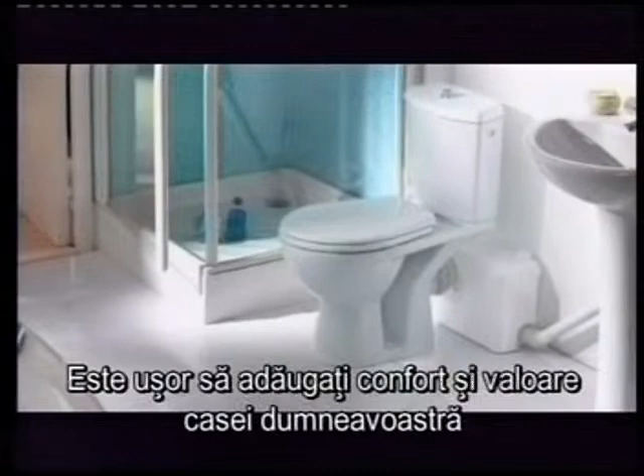It's easy to add luxury and value to your home with SaniFlo pumping systems. From loft to basement and most places in between. A downstairs loo, a kitchen or utility room, even a bath or shower room.

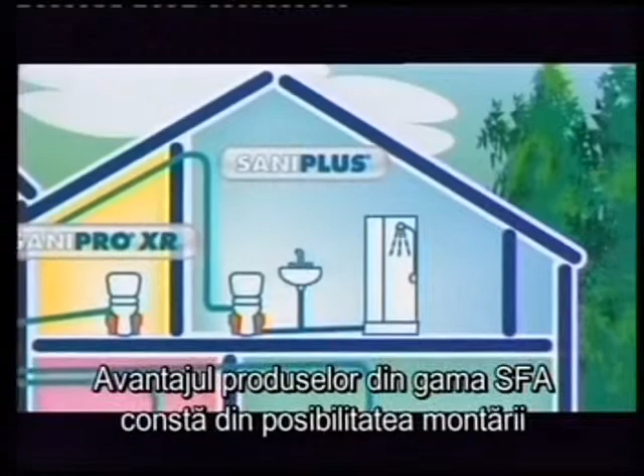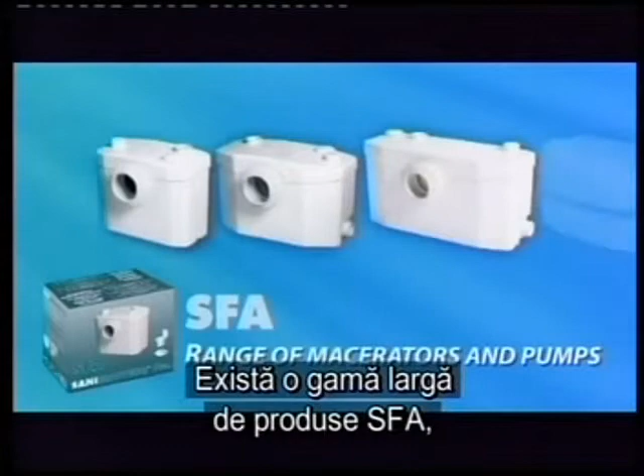The key benefit the SFA range offers is extra facilities almost anywhere, from loft to basement and most places in between. An understairs cloakroom, a basement installation, an ensuite shower room or a loft conversion. There's a range of SFA products, each designed for particular applications and markets.

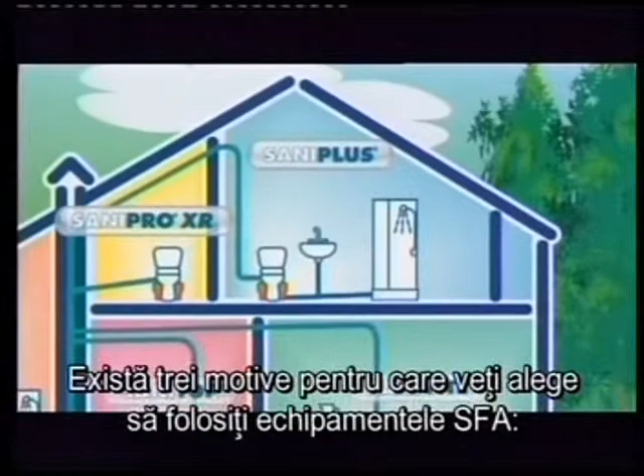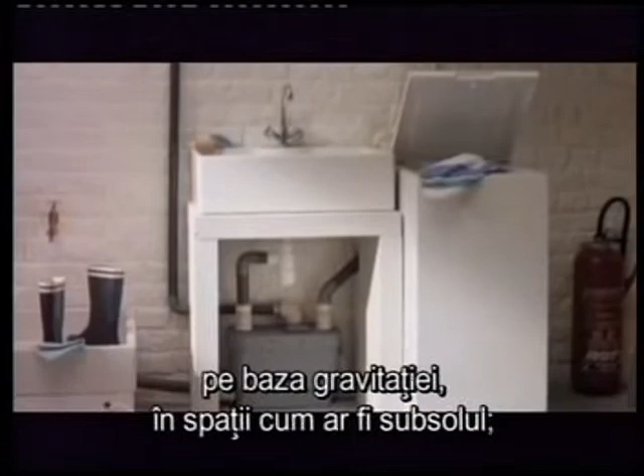From an additional WC to the addition of a complete bathroom in hard-to-plumb places. There are 3 reasons why you would use a SFA unit. 1. Because it's impossible to use conventional gravity drainage, as in a basement. 2. Where it would be too disruptive. Or 3. Where it would be too expensive.

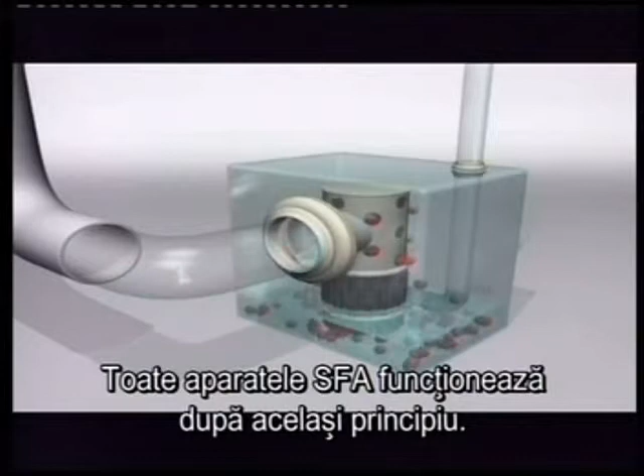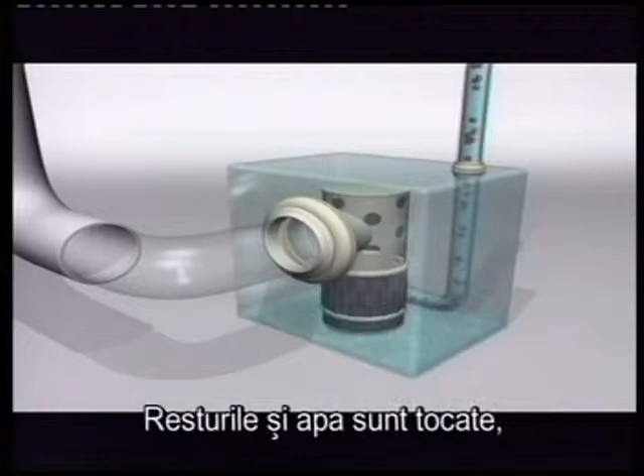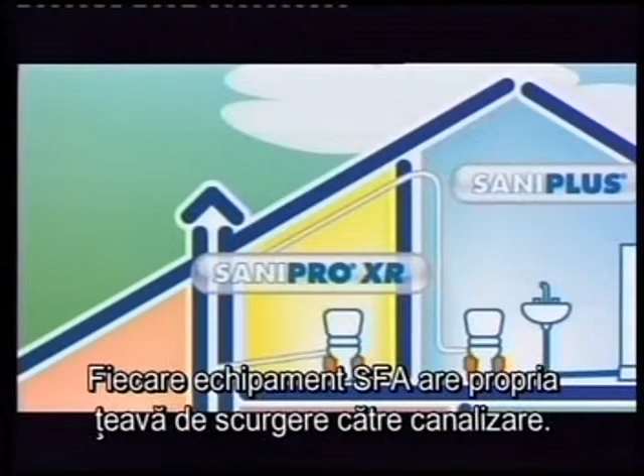All SFA units work on the same principle. Water and waste are drained by gravity into the unit. As the liquid rises, a pressure switch automatically activates the motor. Waste and water are macerated and then quietly pumped away through small bore pipework to a remote soil stack or sewer. Each SFA unit needs its own separate discharge pipe to the soil stack.

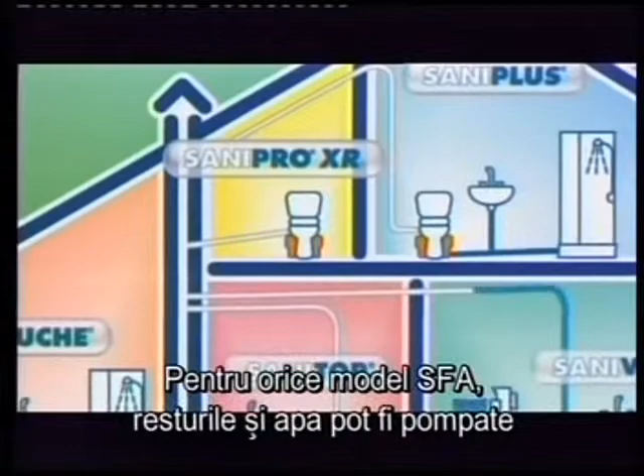The non-macerating pumps in the SFA range work on the same principle, except that they take only wastewater and cannot be connected to a WC. Depending on the model chosen, waste and water may be pumped vertically or horizontally, or a combination of both.

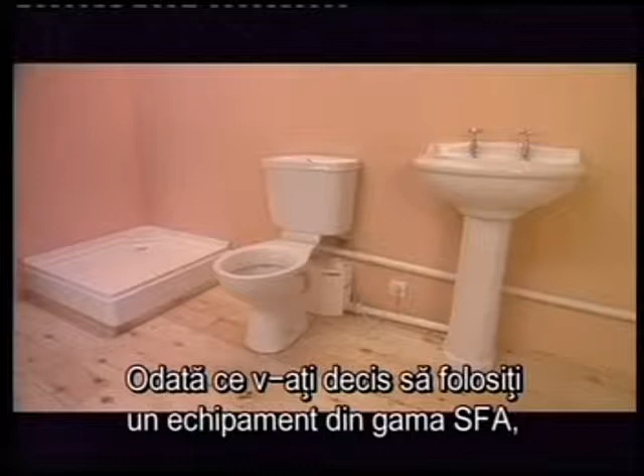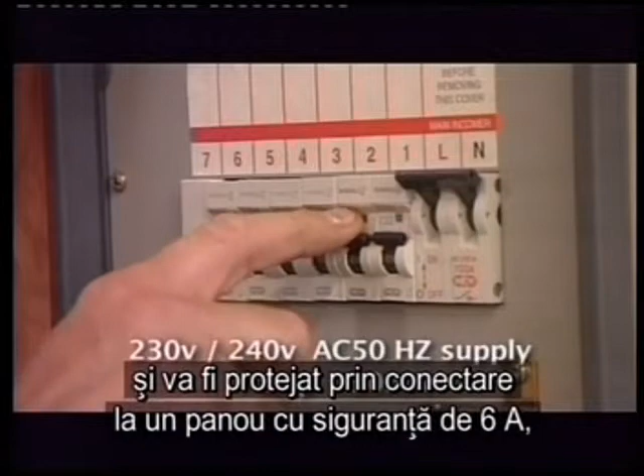Having decided to use a SFA, you must respect the standard electrical norm requirements. The unit requires a 230 or 240 volt single-phase AC 50Hz supply and should be connected to an unswitched fused wiring connector protected by a 6 amp fuse or circuit breaker. Warning: before any intervention on the appliances, disconnect the power supply.

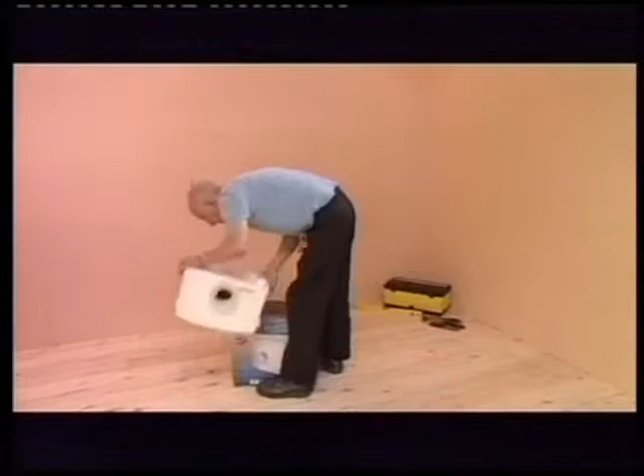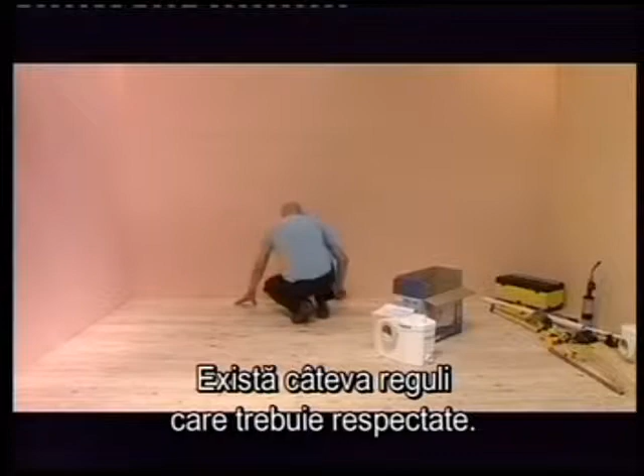Installing a SFA correctly will ensure that the installation will operate efficiently and that it will be covered by our guarantee. The guarantee does not cover incorrect installation or misuse. There are a few important do's and don'ts. Always run any horizontal discharge pipe on a minimum 1 in 100 fall.

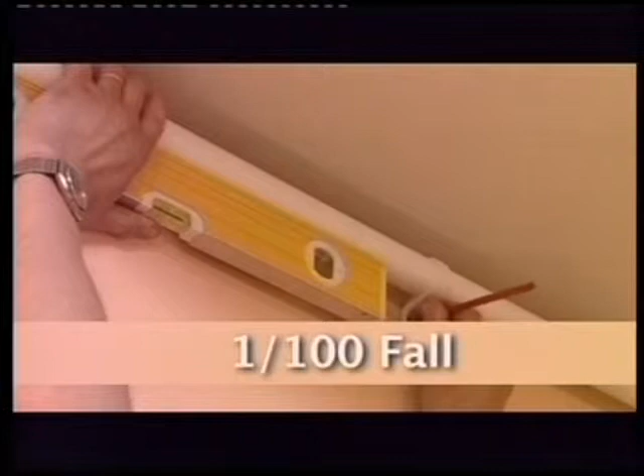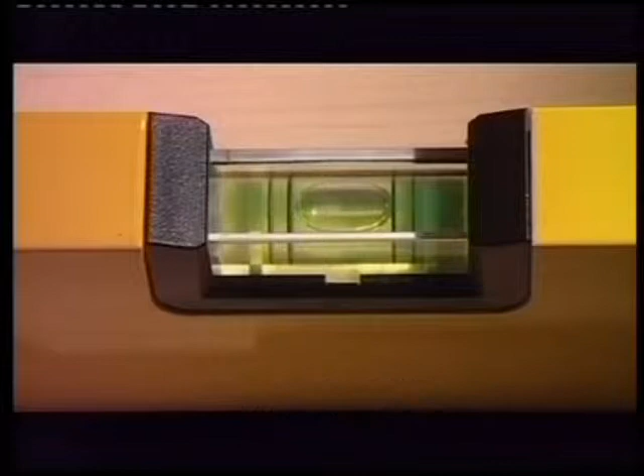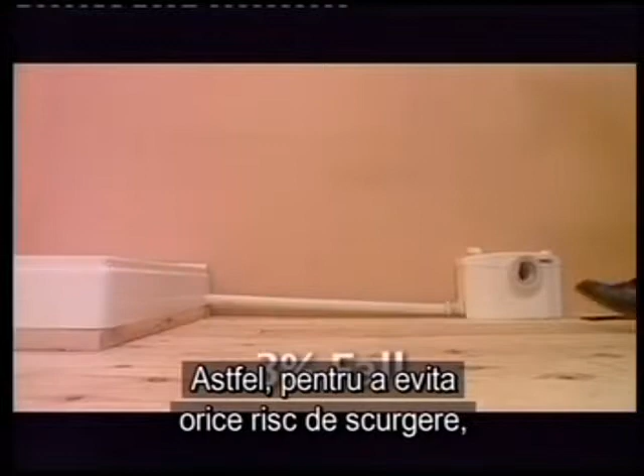Remember that the pump macerator unit does not suck in the incoming waste, so this has to enter the unit by gravity. This is especially important when installing a low trap item such as a shower. To avoid any risk of discharge, the sewage pipes should be fixed at a 3% fall.

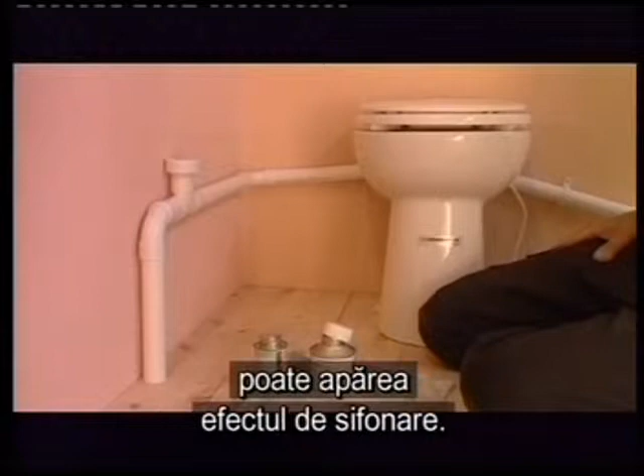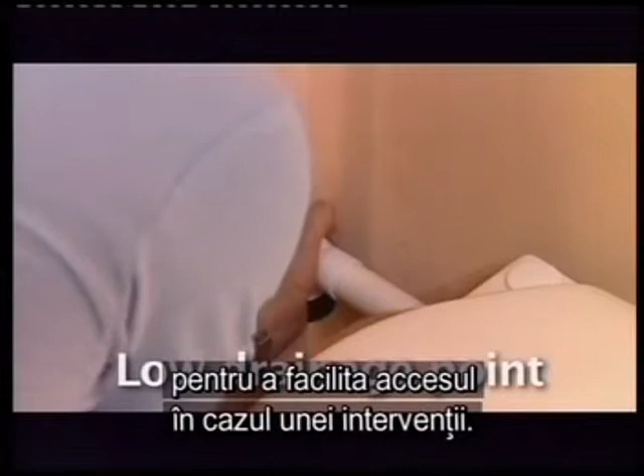If the discharge pipework runs to a level considerably lower than the unit, the resultant siphoning effect can suck out the water in the unit. Fitting an air admittance valve at the high point of the pipe run will overcome this problem. It's advised to install a drain-off point in order to be accessible for maintenance. Each SFA unit needs its own separate discharge pipe to the large bore discharge pipe or soil stack.

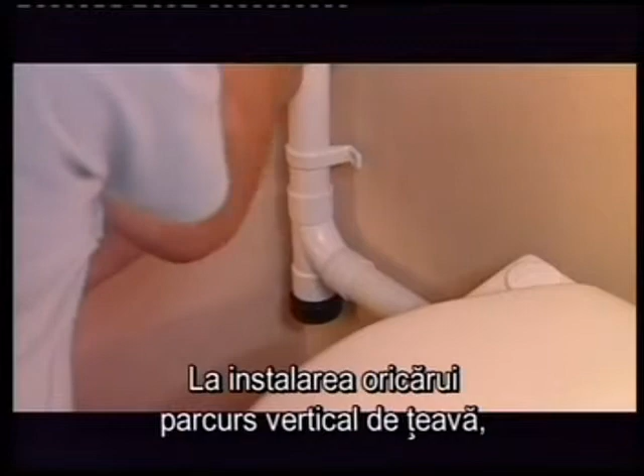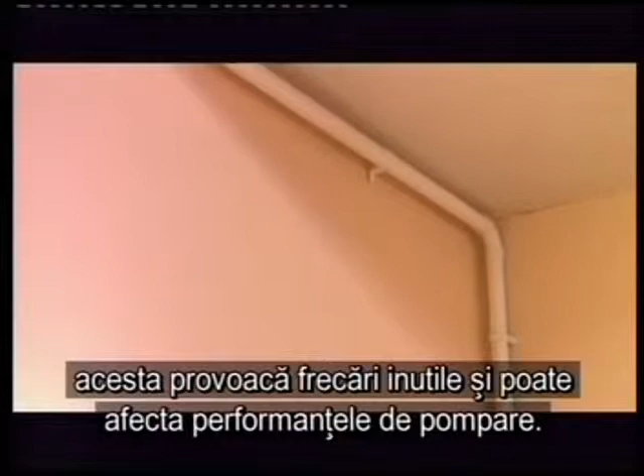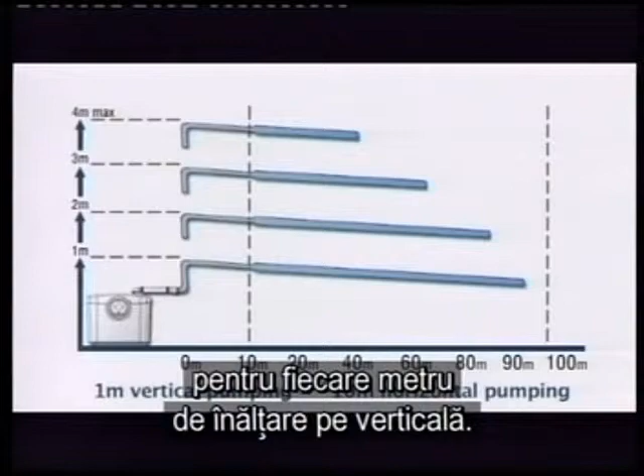Always run any vertical rise that may be required at the start of the pipe run, as near as possible to the SFA unit. This will ensure maximum pumping efficiency. A long horizontal run adds unwanted friction loss to the pumping operation. Vertical pumping reduces the distance the unit will pump horizontally, roughly by 10 meters horizontally for every meter of vertical lift. For the SFA macerators, a 22mm discharge is suitable.

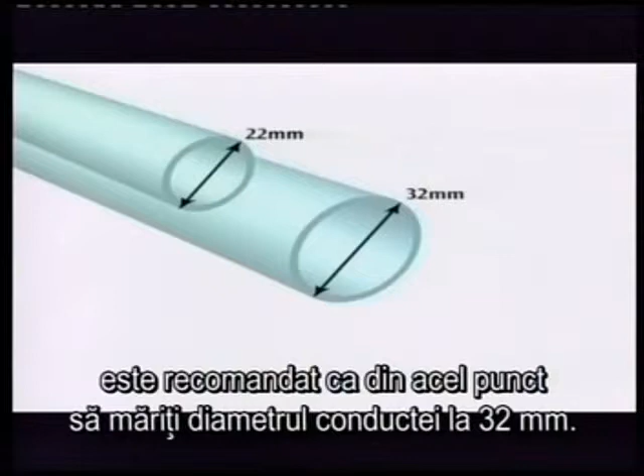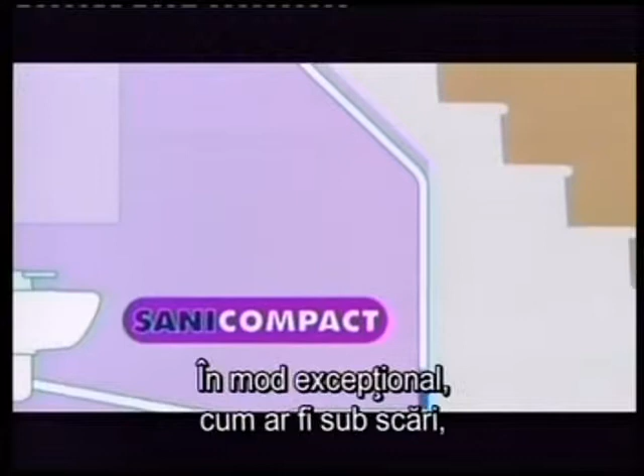You'll need a 32mm for the non-macerating pumps. If the horizontal run is longer than 10 to 12 meters, it's advisable to increase the bore size to 32mm. This allows for easier drainage of the pipe. For every bend fitted, the vertical pumping is reduced by 50 centimeters. Exceptionally, as under the stairs, a short length of vertical pipe can be placed at a 45-degree angle.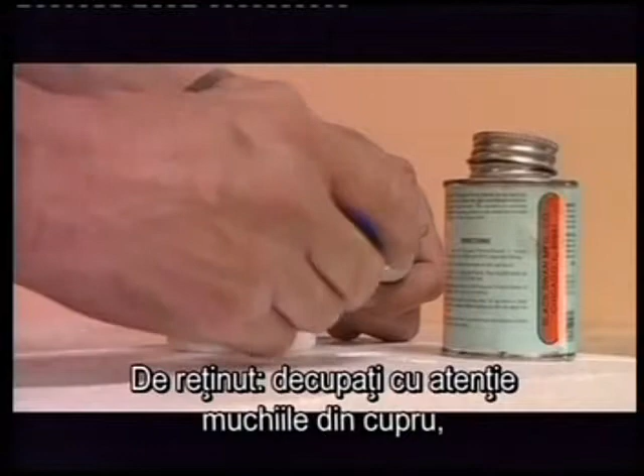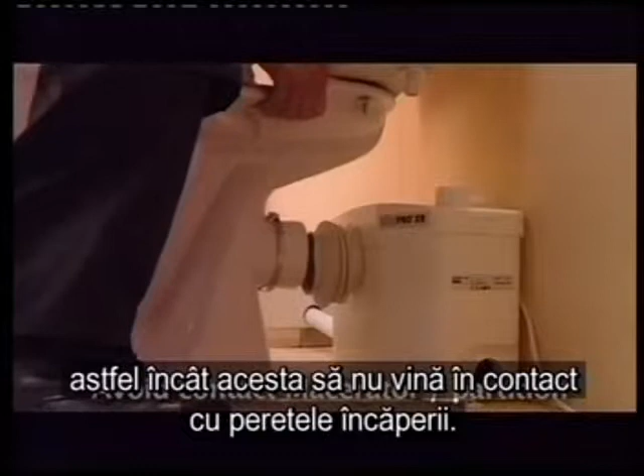A useful tip to remember is to deburr copper edges carefully, and if using plastic, ensure you wipe off any excess solvent. It's important to position the SFA unit so that it is not in contact with a partition or wall of the room. Fix the discharge pipe correctly, with distances of not more than 1 meter between the fastenings.

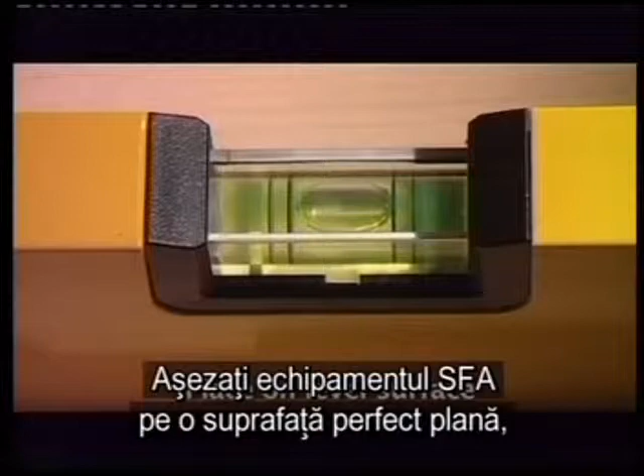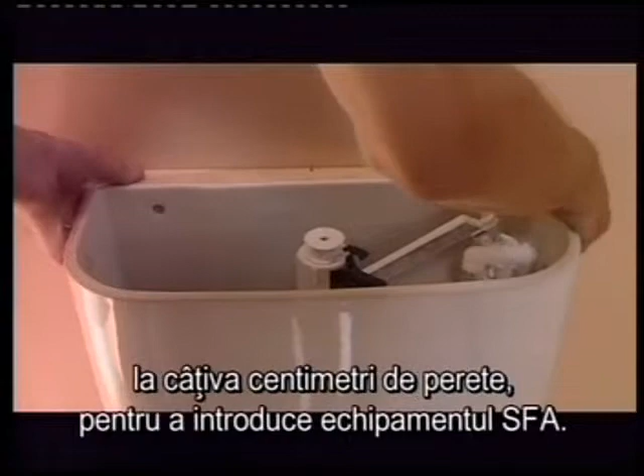Place the SFA unit on a perfectly level surface to ensure that the resilient mounts are fully efficient. Subject to the depth of the cistern, you may need to batten it from the wall by a few centimeters in order to accommodate the SFA unit. Use flexible fixings in order to either fix the appliance to the ground or to avoid the transmission of vibrations.

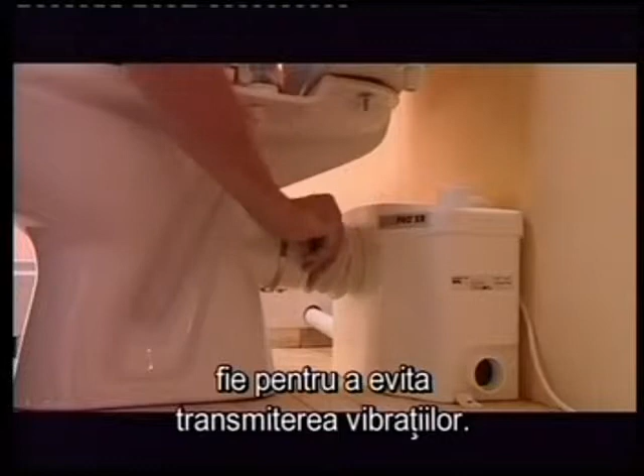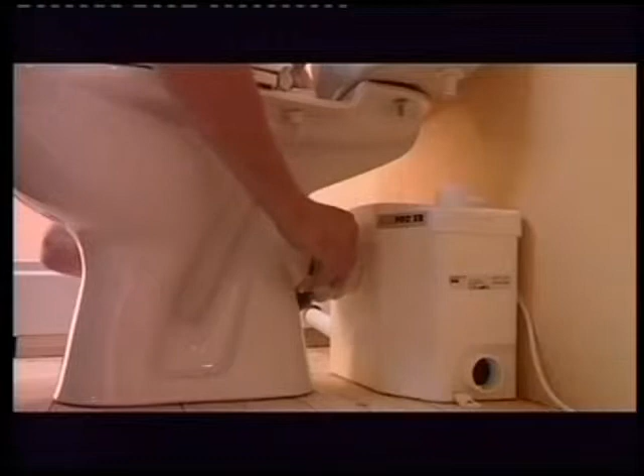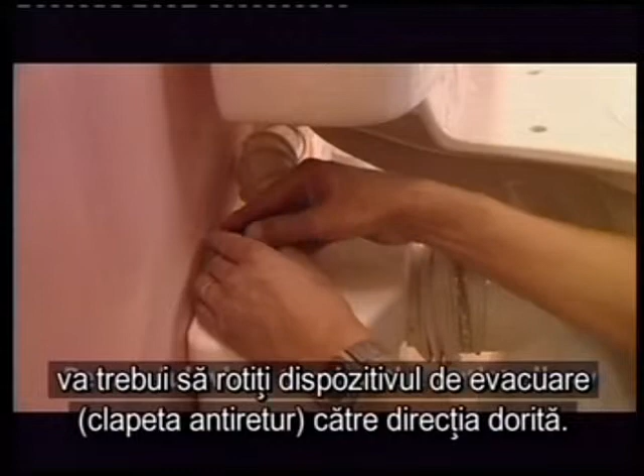To fit the discharge bend, you need to turn the outlet elbow in the desired direction, and then use the rubber hose, making sure it's not kinked, to connect it to the unit.

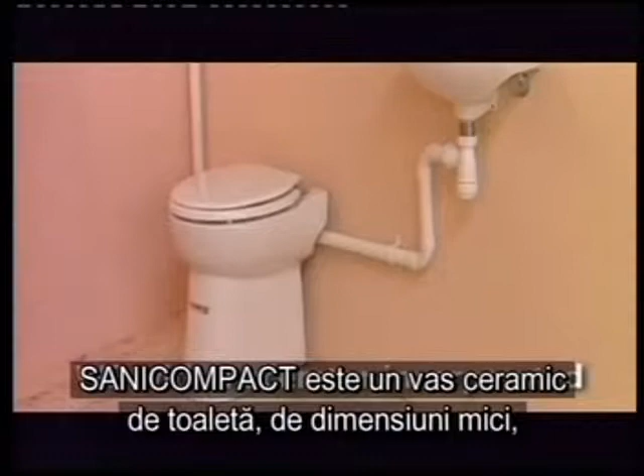For wall-hung sanitary ware, the SFA is a macerator with a shallow depth, especially made for built-in installations. SaniCompact is a space-saving ceramic WC with a macerator incorporated. Position the screws and the set squares, place a silicone joint at the base of the bowl. Fix the appliance to the ground.

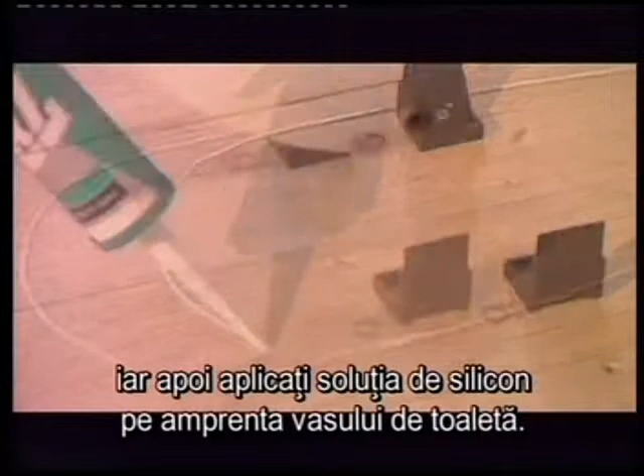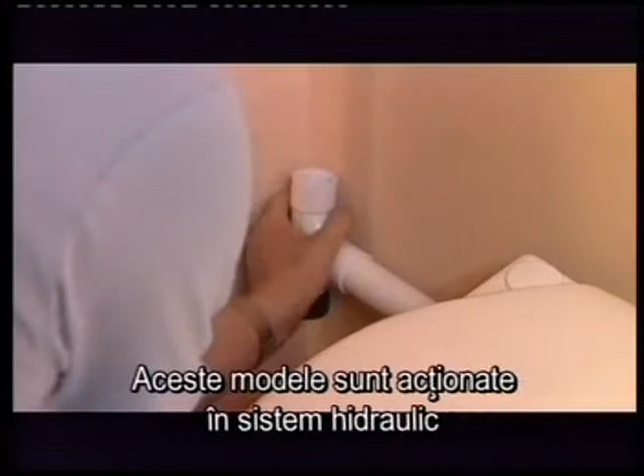The SaniCompact model needs no cistern. It's connected directly to the main sewer. These models are hydraulically operated with a push-button flush. The SaniCompact model is an easy-to-install model. It's able to be fitted to a hand basin.

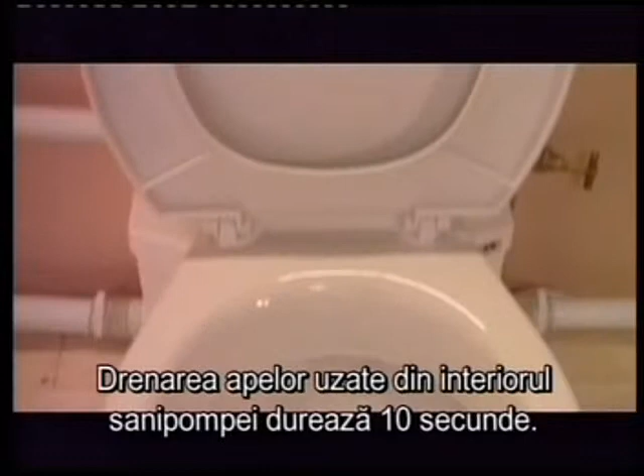Some installers hide the cistern and the SFA unit behind panels for cosmetic reasons. In this case, always check that the SFA unit is accessible and removable for possible maintenance. This includes full access to the Jubilee clips securing the inlets and outlets. The drainage of used water from a macerator lasts for around 10 seconds. The new SFA models are now quieter thanks to a reduction of the noise transmitted.

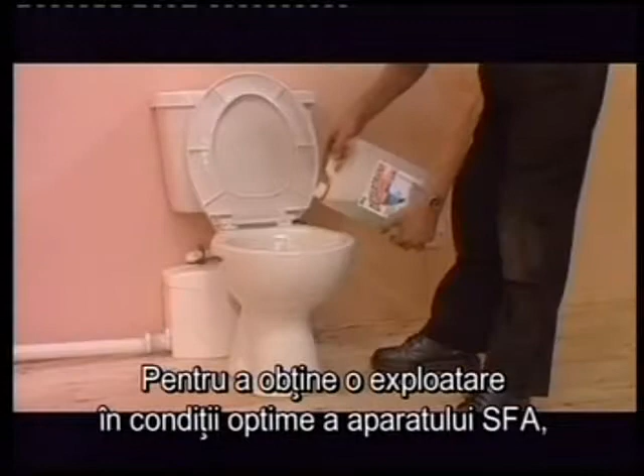To gain the best result from your appliance, we advise you to regularly descale the macerator with an adapted descaler, for example, the special SFA descaler. The frequency of this operation depends on the hardness of the water in your region.

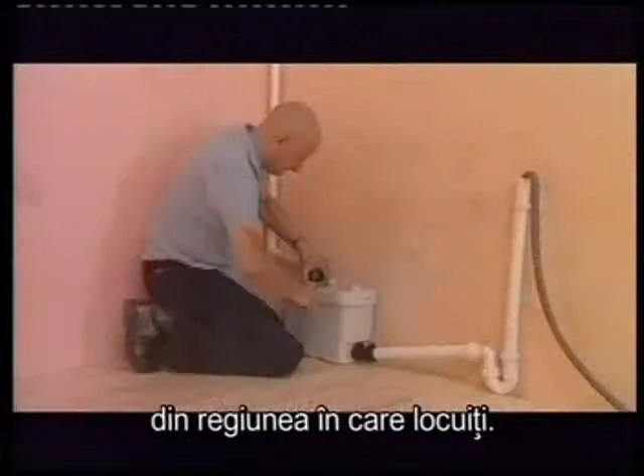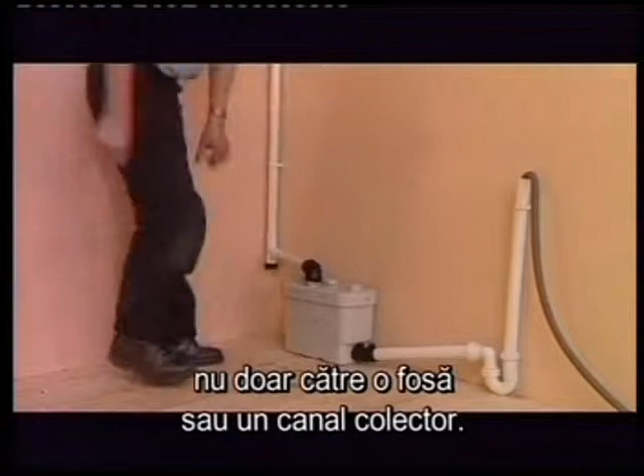SFA pumps such as SaniSpeed shown here are fitted in the same way, except that they may discharge to a drain as well as a soil stack or sewer. They are specially designed to accept hot, soapy pumped wastewater from washing machines and dishwashers.

The SFA range of products is backed up by a national guarantee. We also operate a nationwide network of experienced service engineers who will call on site in the unlikely event of failure of the unit. Correctly installed, SFA units will give many years of quiet, trouble-free use. You'll find installation instructions in the box.